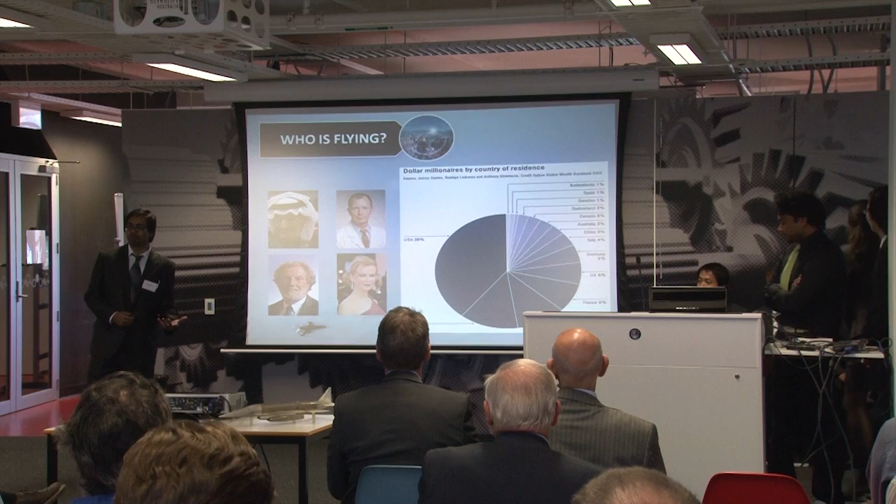With the high costs associated with such an aircraft, we are aiming towards the high end of the wealth spectrum. Most likely, millionaires and billionaires. Now, as you can see, the majority of millionaires currently are in the USA, but there is a good portion in other areas such as China, France, Russia, and other parts of Europe.

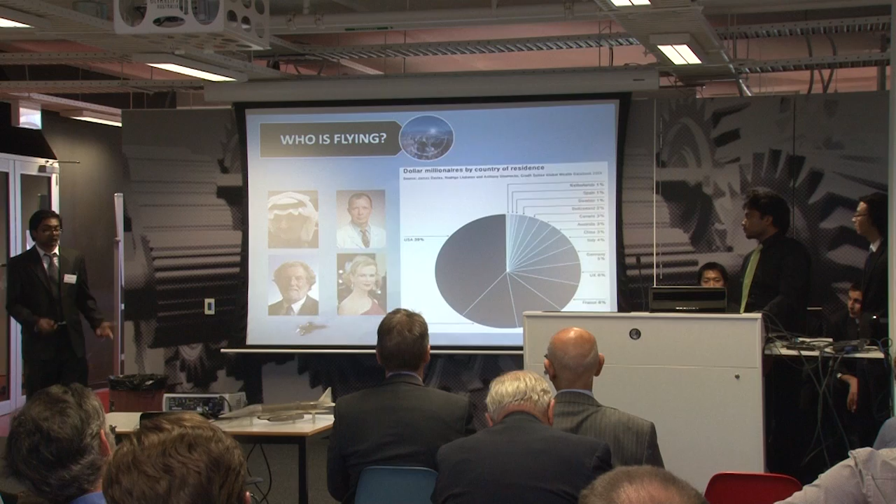So, within these millionaires and billionaires, which specific people are likely to fly this aircraft? Well, we're considering highly specialized personnel who are expert in the field and very rare to find. Actors that have a very tight schedule, as Hollywood will tell you. And if there was a contender for private purchase, it would be none other than our famous Prince Alwaleed bin Talal, who has recently purchased an Airbus A380 for $500 million.

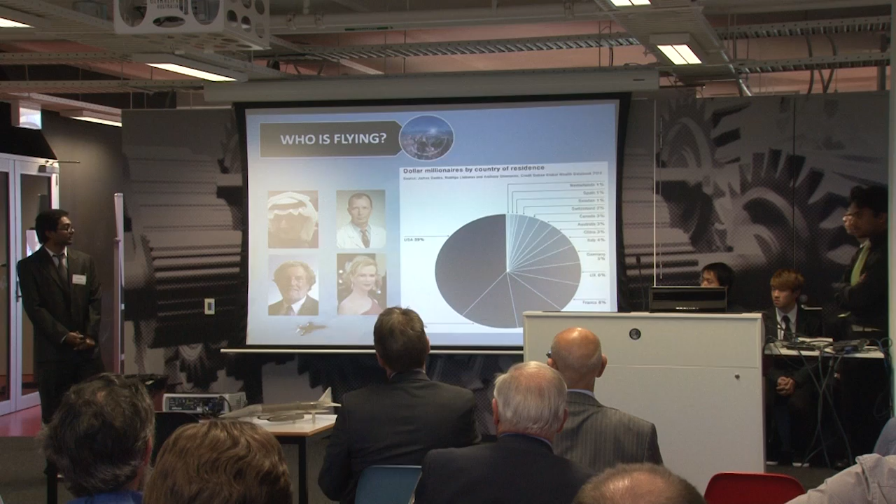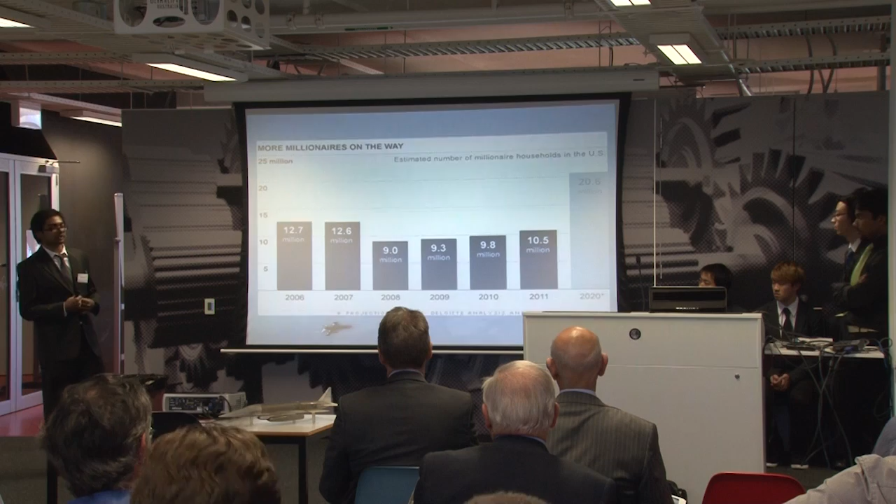Now, this is the current market, but into the future, we expect that by 2020, the number of millionaires will increase, and that's quite a sizable market which we plan to tap into. Now, the question is, where can we fly? Well, we are restricted to fly mainly over the ocean because supersonic flight over land is currently prohibited. So, for example, you've got Sydney to San Francisco on the light blue line here, and you might be wondering why we have a route over the land.

Yes, that is true. Current supersonic flight is banned. However, the regulations in FAR 91 do say that you can apply for an authorization to exceed Mach 1. And we believe that as supersonic designs are refined and methods of mitigating sonic booms are investigated, future regulations are likely to change to allow, once again, supersonic flight over land.

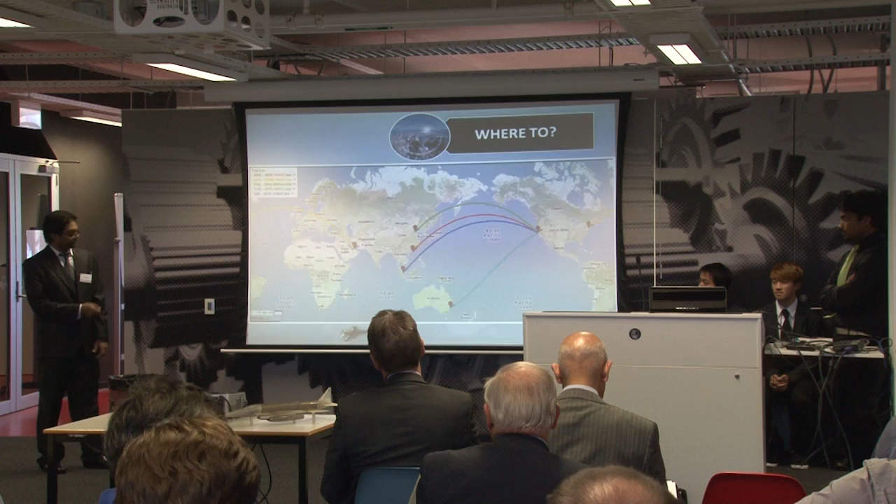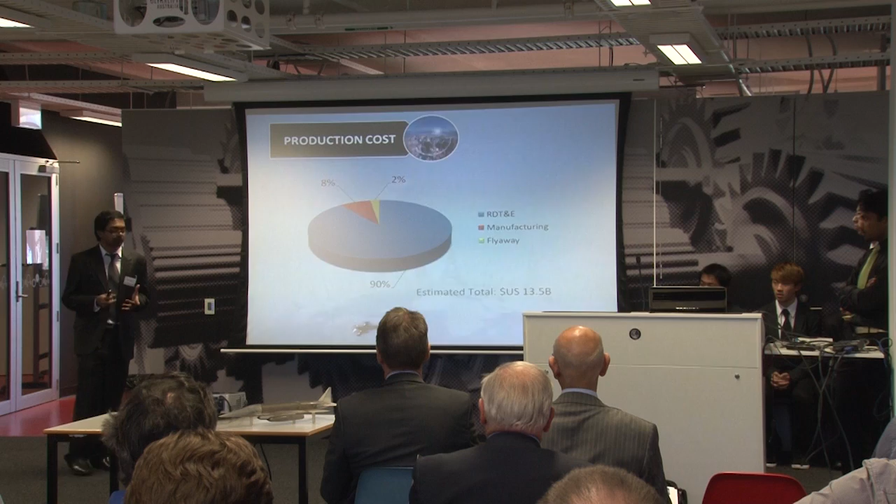Now, it comes to cost. As I mentioned before, only the millionaires and billionaires are likely to fly this because our estimated cost is $13.5 billion US. And we believe the majority of that will go towards research, development, testing, evaluation, and certification. So it's 90% cost for that, which is not too unreasonable considering most companies do spend the majority of their initial cost on R&D.

Also, no single company would be willing to take on such a risk of investing all their money. So we think that a conglomerate of companies pooling their resources, funds, and efforts together would diversify the risk of such a high risk and high return investment.

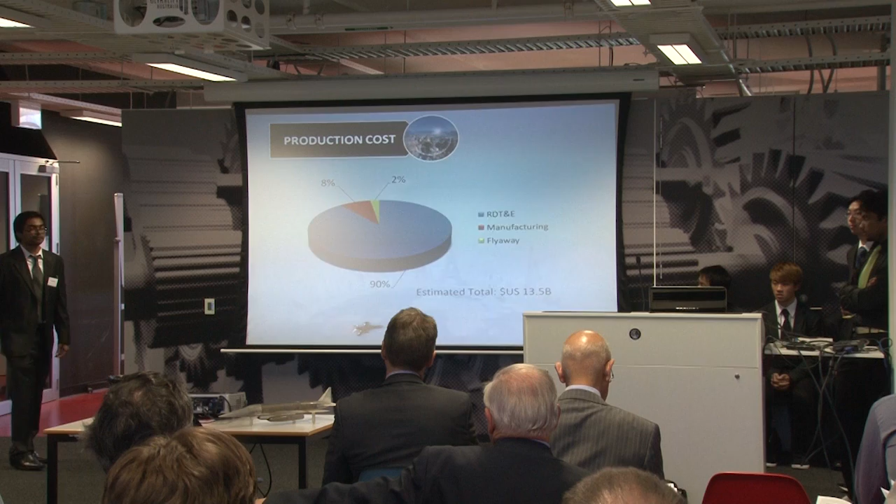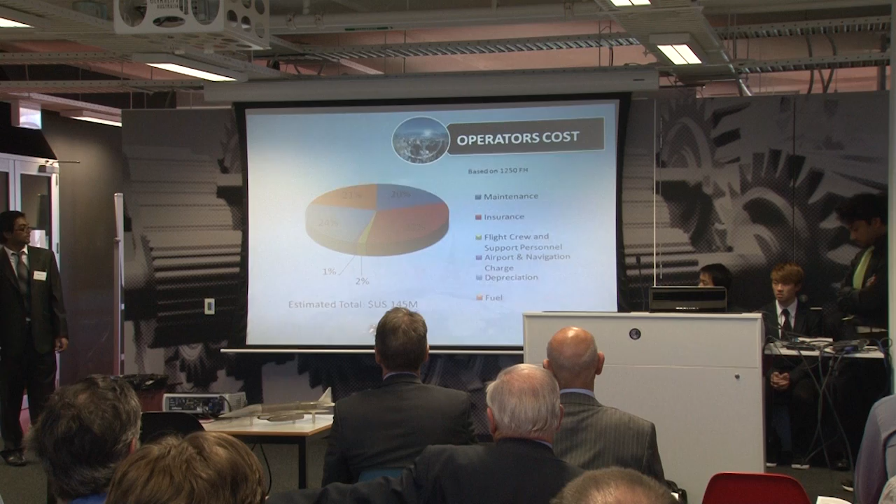So if a company was to purchase one unit, we estimate their total cost will be about $145 million for 1 year, assuming they fly the aircraft for about 1,250 hours. That includes your fuel, navigation charges, maintenance, insurance, personnel, and depreciation. So I'd like to call Tony to present our flight profile.

Thank you, Tom. So I'm going to be talking about our sample flight profile, and this will be from Sydney to San Francisco. This is approximately 12,000 kilometers. So after taking off, we'll be doing an accelerated climb up to our cruise altitude, which is initially 21 kilometers. In this stage, we made sure that we went supersonic outside the regulation specified limit, and we'll be cruise climbing to about 23 kilometers.

This is the bulk of our trajectory, and then the engines will be shut off, and we'll be going into our glide phase. And the glide phase can be customized depending on the destination. The reason why we're flying at such a high altitude, 6 kilometers higher than the Concorde, is to maintain low drag while still having enough lift. And also, we're flying the tropopause, which offers the lowest ambient air temperature.

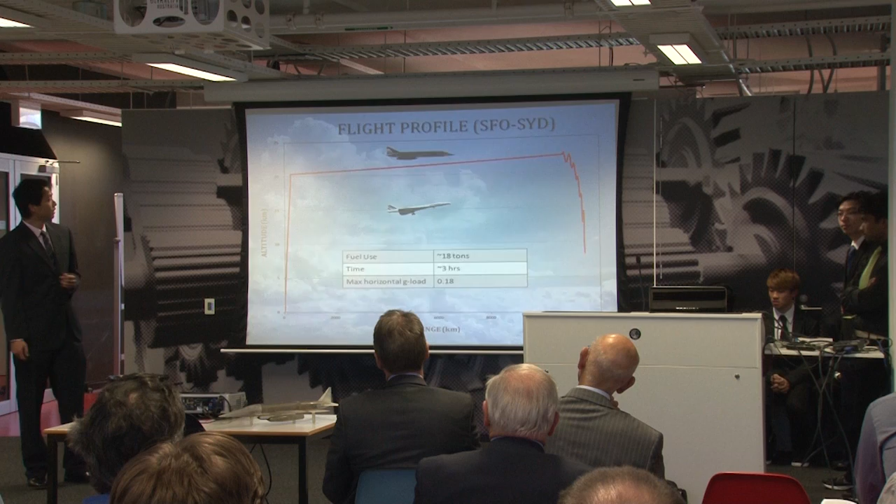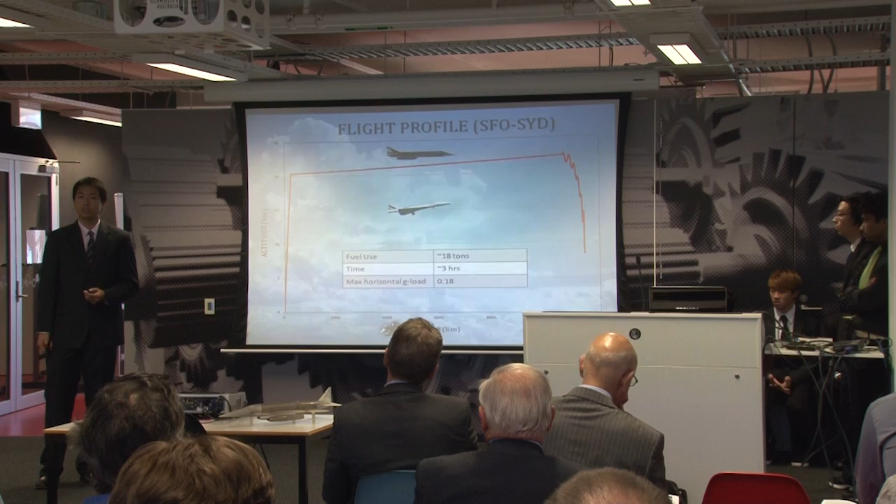For this sample, we're using about 18 tons of fuel, but we will be adding around 6 tons for reserve. And also, it will take about 3 hours, and the maximum horizontal G load is pretty much negligible. So, I'd like to call on Wissam to talk about our configuration.

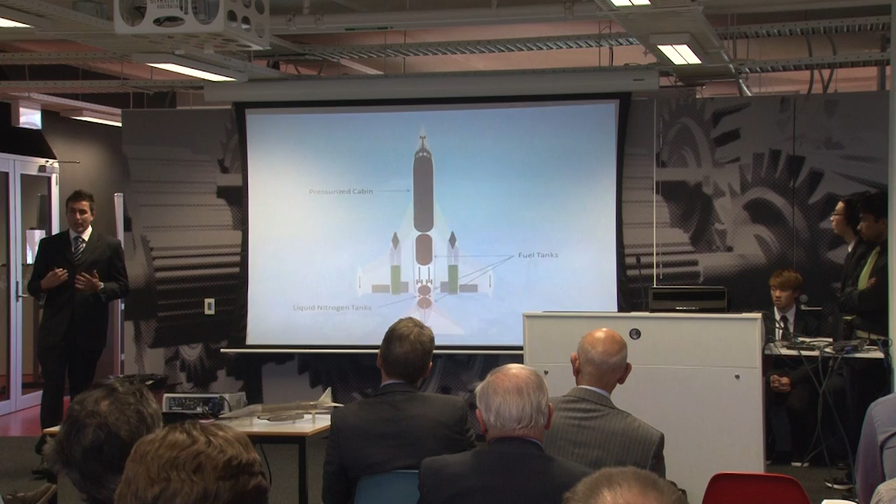Thank you, Tony. So let's move on to the configuration of our aircraft. The configuration of our aircraft is primarily based on stability, due to the fact that the aerodynamic center moves by half a chord from the subsonic to the supersonic phase of the aircraft.

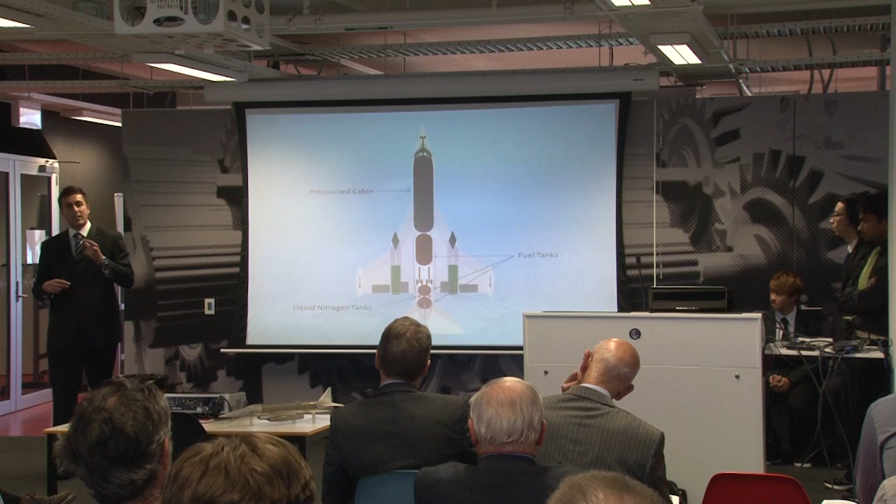As you can see, the pressurized passenger compartment will be positioned further forward on the aircraft. We also went for a split fuel tank design to achieve fuel trimming. This can come to our advantage to ensure that the CG position is as close as possible to the aerodynamic center, to minimize fuel consumption during the actual cruise flight of the aircraft. The fuel tanks will also be pressurized with nitrogen to ensure that the fuel does not vaporize at high altitudes due to the pressure difference that we encounter.

Now, moving on to the actual propulsion system of the aircraft. We see many concepts coming around with supersonic and hypersonic aircraft using hydrogen fuel propulsion systems. We considered this in our design, but unfortunately, due to the space requirements for the fuel and the actual safety issues we encounter at airports, this was deemed not feasible.

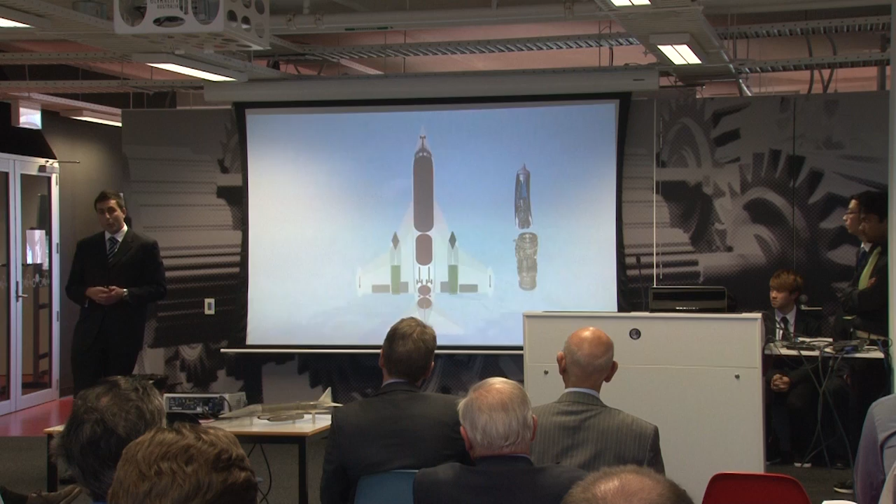So we went for a traditional turbojet design, the J58 engine, which is used in the SR-71. However, it requires some slight modifications to ensure it operates at Mach 5. These modifications include the pre-cooler. Due to the fact that the stagnation temperature at Mach 5 is very high, we need to pre-cool the inlet temperature to ensure that our compressor and turbine blades can withstand these temperature loads.

So now I'll move on to aerodynamics, which will be spoken to you about by Tara.

The aircraft must be able to maintain aerodynamic efficiency in all phases of flight. In controlled airspaces, the aircraft flies at subsonic speeds, which applies to low altitude climb, approach, and of course takeoff and landing. Beyond these phases, the aircraft will be supersonic until it reaches cruise at Mach 5. Here, the generation of shock waves and the effects of aerodynamic heating take place, and this is where structural considerations have to be made, as will later be discussed by Chris and Tony.

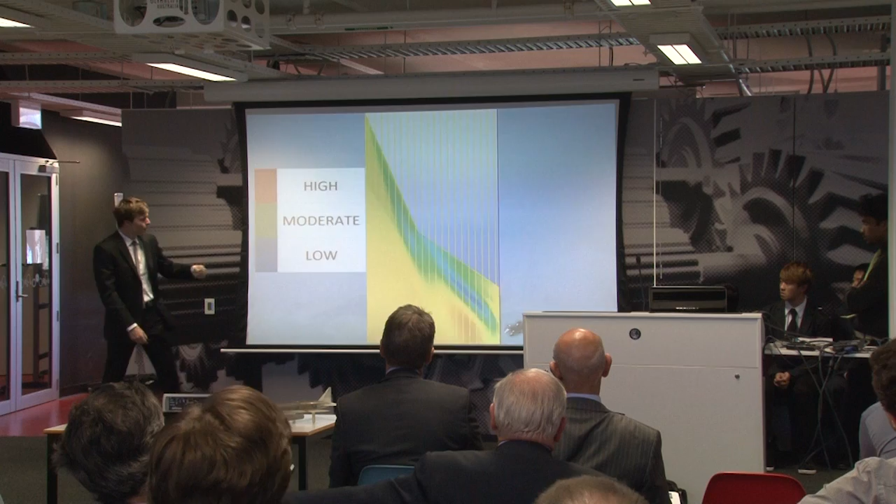We designed our wing in coordination with the aerodynamics department so that we had a higher or more even thickness distribution all the way along the wing chord, such that we could get more structure towards the trailing edge of the wing. As you can see from this diagram, more of the structure, or more of the lift, is generated towards the tip of the wing and towards the trailing edge.

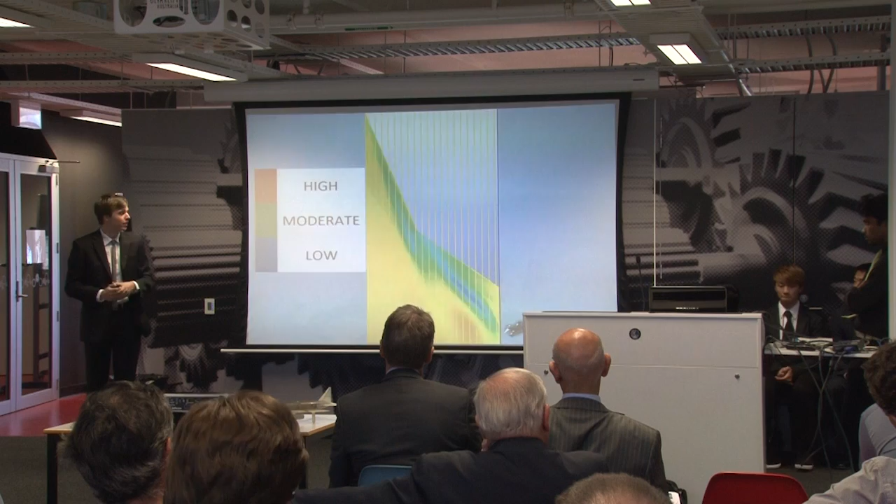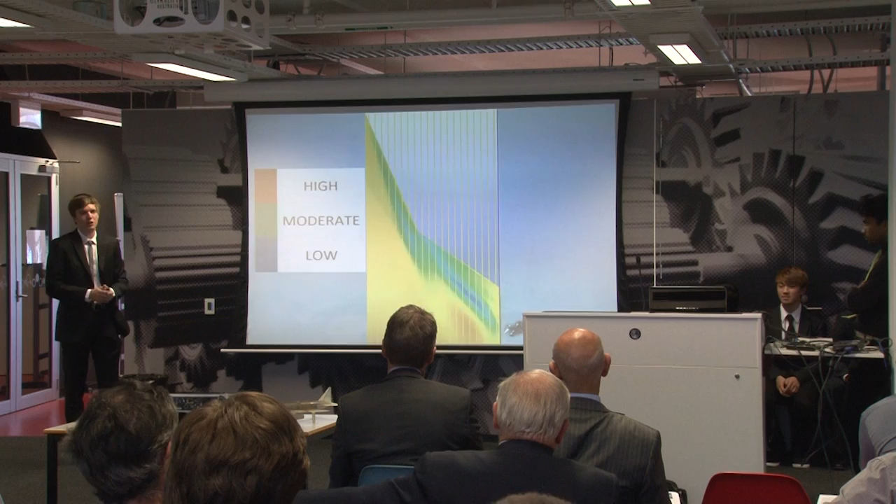Because things like Schrenk make simplifying assumptions which did not correlate well with our wing geometry, we used CFD instead. We have 20 lines across there, 100 samples along it, and using samples at each of those points multiplied by the even area, we were able to get a lift distribution 3D across our wing planform.

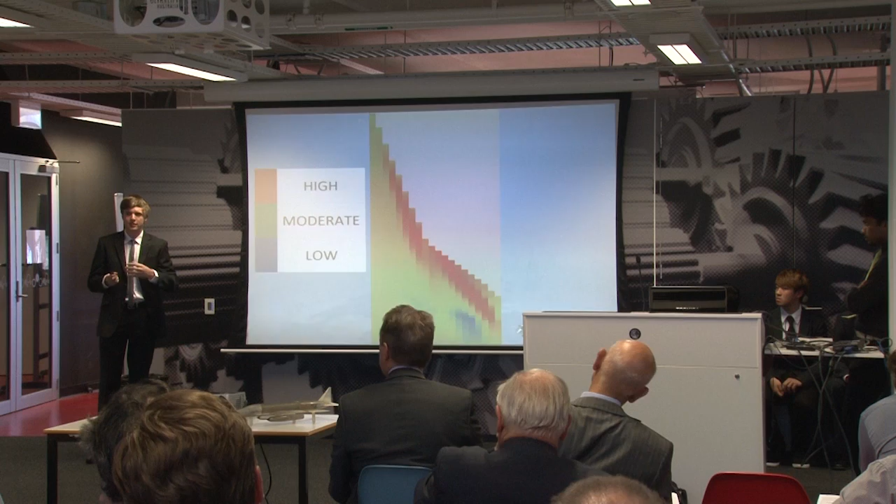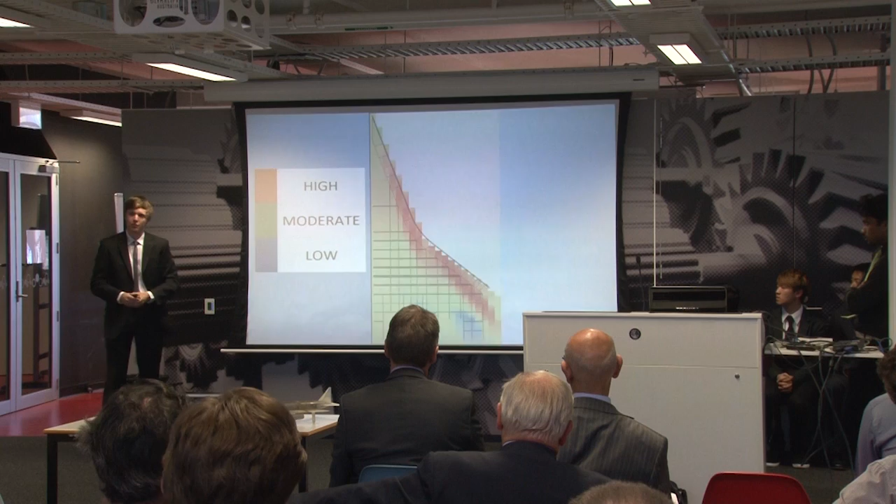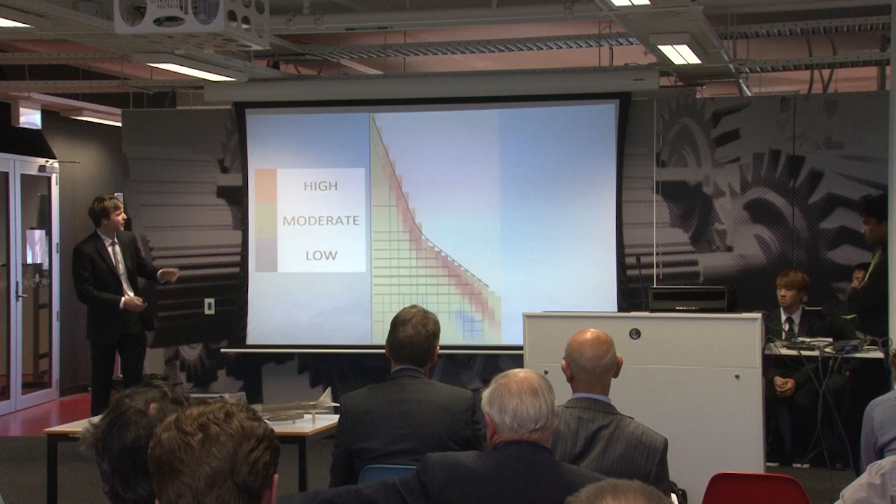We used this lift distribution, exported to Excel, to begin designing our spars. This is our final spar configuration, as well as ribs. Initially, we used other designs. We looked at them, decided approximately how many spars we were going to have, and then started distributing them where the major wing loadings were.

Finally, we had to connect it to the fuselage. We've got 4 highlighted frames there where there are rigid connections to the fuselage. These carry bending moments from the spars to the fuselage, whereas the rest of the spar connections only carry shear loads. They're evenly distributed along the fuselage to have a more even distribution of bending moments being carried into the fuselage.

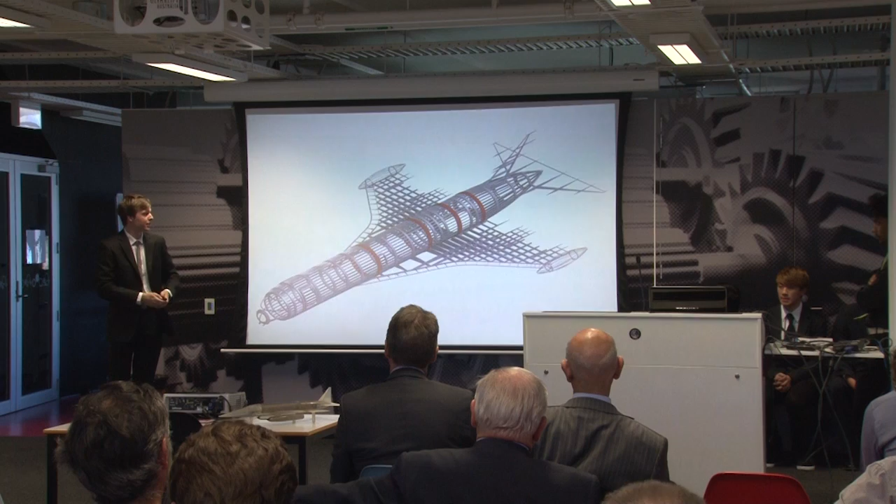And now Tony will talk about fuselage design.

Thank you. So before I start, I'd just like to say, after seeing all those wonderful CATIA images, our CATIA expert Min over there has done an excellent job. So back to the fuselage.

We went for a semi-monocoque design throughout the entire fuselage. And like Chris mentioned, we have a very large interior and exterior pressure difference due to our flying altitude, which is higher than normal aircraft. So in the zoomed-in view there, we went for a 2-skin design with frames and stringers in between.

The internal skin will be made from Kevlar composite, which offers high tensile strength and also fatigue resistance. This will be taking all the pressure loads. The outer skin will be made from a combination of titanium and zirconium diboride, to deal with the thermal stresses. The fuel tanks will also be made using a similar method from Kevlar with a filament wound method.

So next is Andrew, and he'll be talking about the thermal management system.

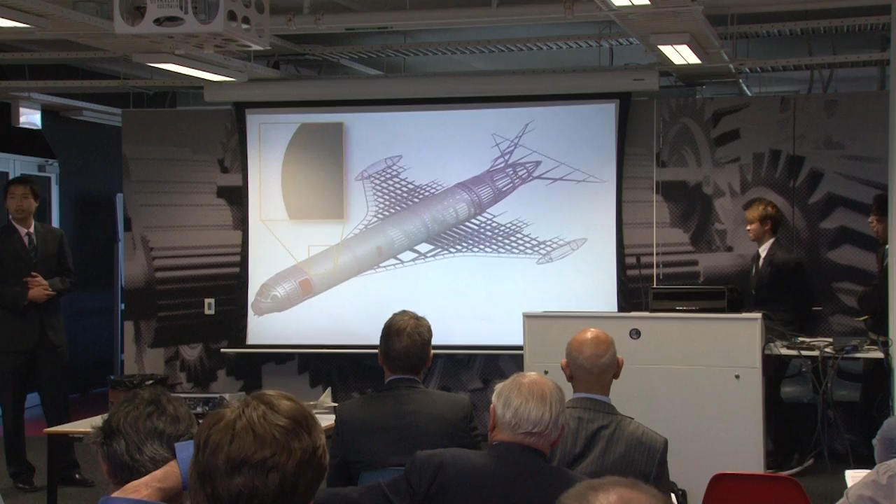Same as other supersonic aircraft, the Hyperion will be experiencing a great amount of aerodynamic heating. We calculated the stagnation temperature at Mach 5 cruise speed to be 1065 degrees Celsius, and therefore we have a thermal management system on the aircraft to address this issue.

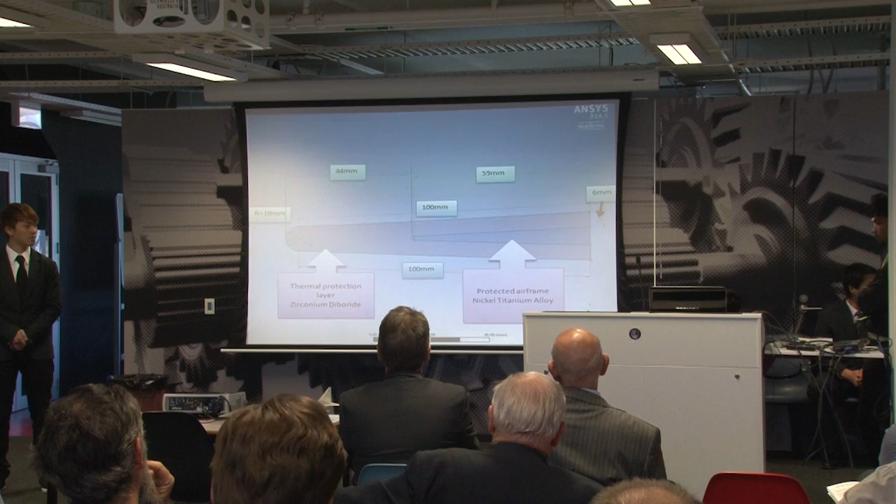So we designed a thermal protection layer at our leading edge, made up of zirconium diboride. This material has relatively high heat conductivity, so that it can work with our fuel cooling system. This picture shows the FEA analysis of our leading edge, and we used this to determine the thickness required to keep our internal structure below 600 degrees Celsius.

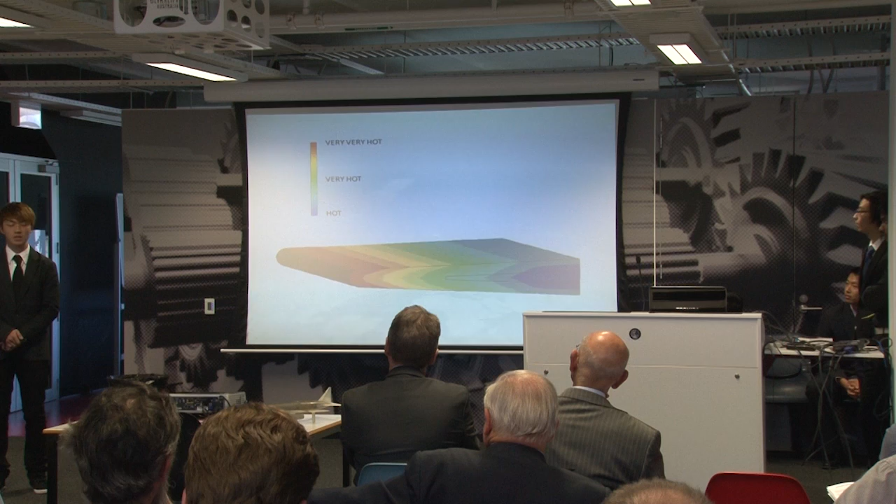And we have a fuel cooling pipe in this area, so we will run the fuel of the aircraft through this pipe so that we can use it as a heat sink for our aircraft. At the very front end of the aircraft, we will have a nose sink, as Taryn mentioned as well. This nose sink protects the frontal area from aerodynamic heating.

The surface of the aircraft will be finished with iron ball paint. This paint contains carbon black material, which helps to radiate heat away from the aircraft surfaces, which also makes our aircraft color black as well. So with the thermal management system, the Hyperion will be able to fly safely at hypersonic speed.

Back to Chris for the conclusion. Thanks very much, Andrew. We believe that this aircraft could be technologically possible in the next 10 to 20 years. As was clear from the costing stage, a large amount of money will need to be put into research and development, particularly into materials and propulsion. This makes the costing stage a little bit speculative. We believe that this will be a high-risk project that might need to be taken on by a conglomerate of companies, but it maintains a high reward. Thank you.

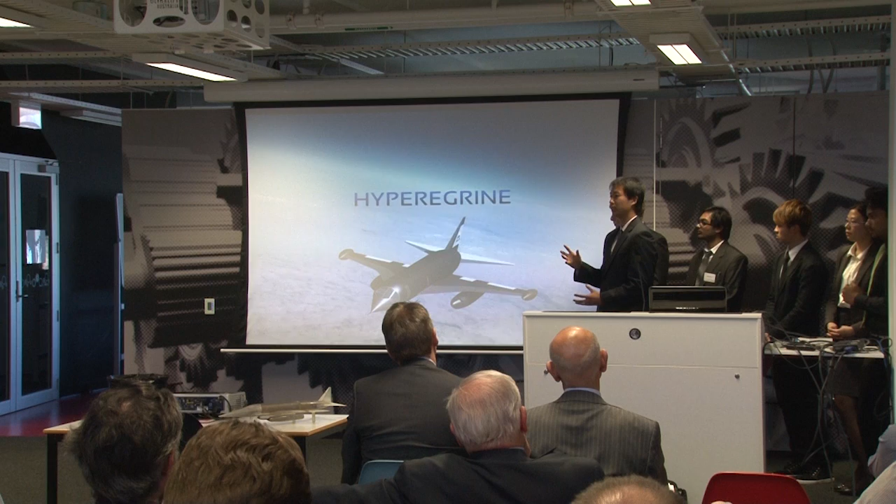What did you say the fuselage frame is made from? The interior skin is a Kevlar composite. The frames and stringers are titanium. The outer skin is a combination of zirconium diboride and titanium, with more zirconium diboride in the front to deal with the heat, and as the heat is lower throughout the back, we'll use less of it.

Where you had the double skin, did you consider the difference in thermal expansion rates between those materials? We haven't designed any differential joints or expansion joints at this stage, but we do know there's going to be differential expansion between the inner skin and the outer skin, and also between the fuselage skin and the wing box, so there will have to be different joints there.

And the outer wing has different temperature profiles across it as well. We weren't able to get a full temperature profile from CFD, so we used PANAIR instead, but we know there's also going to be differential heating.

What about a way to combat water ingress in the Kevlar skin? We know we're going to have to coat our fuel tanks to avoid corrosion from the fuel directly to the Kevlar skin, but we would also have to do that with an aluminium tank. We didn't specifically look at water ingress.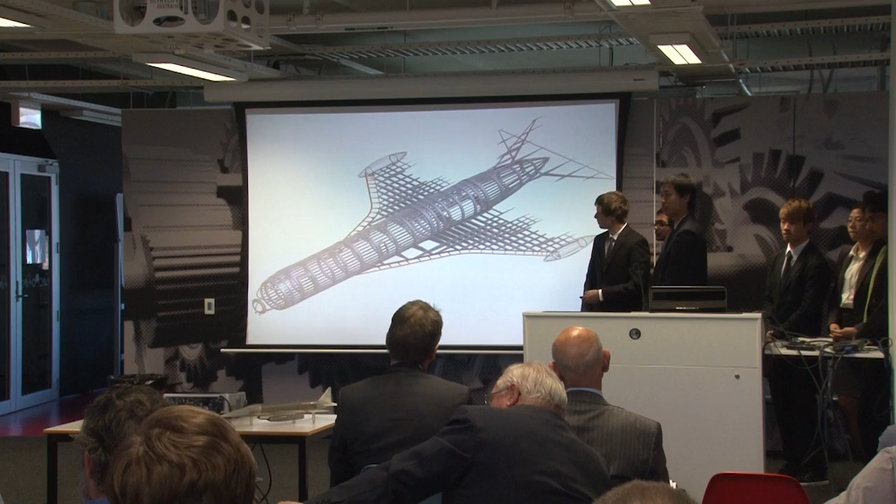Just going back to the fuselage structure again. So you've got a Kevlar inner skin, titanium supporting things, and some other kind of outer skin. How are you going to hold it all together? What are you going to use, mechanical fasteners or bonding, or what?

It's perfectly bonded between all three. So we're going to have all that bonded together, right? Now, certification authorities tend to be fairly fussy about inspectability of pressure hulls. So we've got a bonded inner skin and a bonded outer skin. How are you going to inspect it?

While the aircraft is on the ground, we could have cutouts inside the exterior skin, so that the panels can be taken apart and we can check what's inside.

Maintenance is obviously going to be a very large concern for pretty much all of our aircraft. It's one of the reasons that we're not flying all the time; we have low flight hours per year. It's another reason why we chose the grid structure. We knew that we needed to avoid acute angles, so that we would have something easily inspectable as well.

Just wondering whether you did a rough calculation of what the ticket price would be. We've estimated that with a ticket price of $25,000, we would generate a revenue of $208 million, which would offset the usual operating cost of $100 million that is appropriate. Considering $25,000, it is competitive with current premium services. For example, Cathay Pacific charges a peak hour fare from Sydney to Los Angeles of about $20,000.

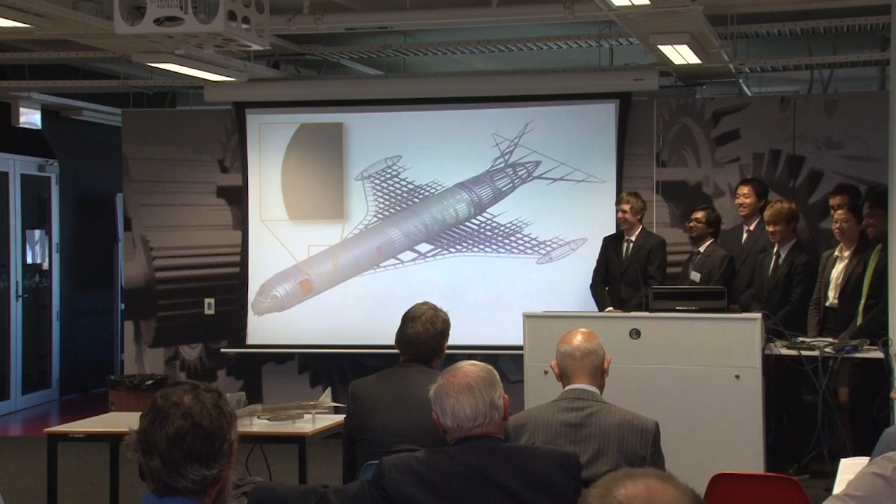Did you do some sort of conceptual cabin layout? Yeah, that was briefly shown in the video.

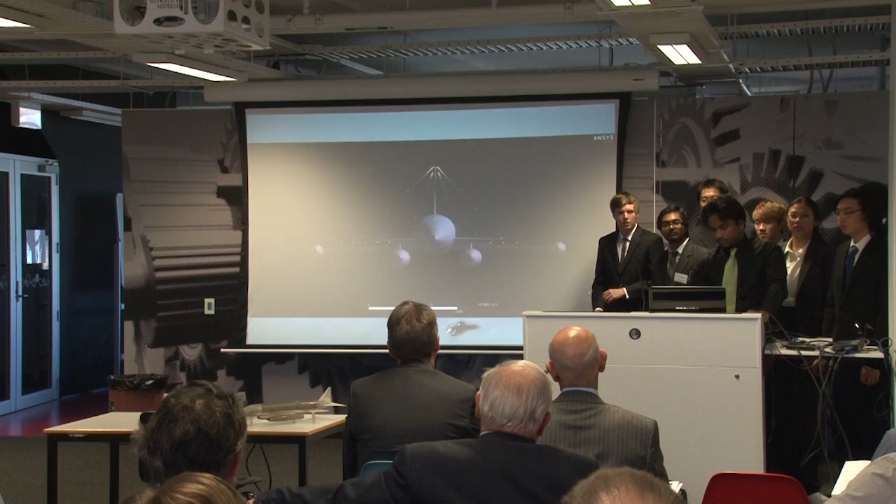Yes, we have a conceptual layout, we can talk about it while this is happening. It's effectively 5 rows with 4 seats per row, separated by an aisle in the middle. It's pretty spacious at about 26 inches per person for seat width, with seat pitch designed to accommodate around the 98th percentile American, so you can pretty much guarantee anyone's going to be able to fit.

Where are you going to get your engines from? I know you specify the engine, but I think they've been made for... Yeah, propulsion is a major thing with our aerospace aircraft, and it's also the weakest part of this design. We would need the company producing it to allow for room for optimization of the propulsion system.

You can see with new trends in aircraft like the Boeing 737, they haven't allowed room for the actual engine radius to be maximized. So what we've allowed for is in the landing gear, to ensure new propulsion systems can be easily put into the aircraft without heavy modifications. And in terms of getting the engine, we basically need to ask the US government.